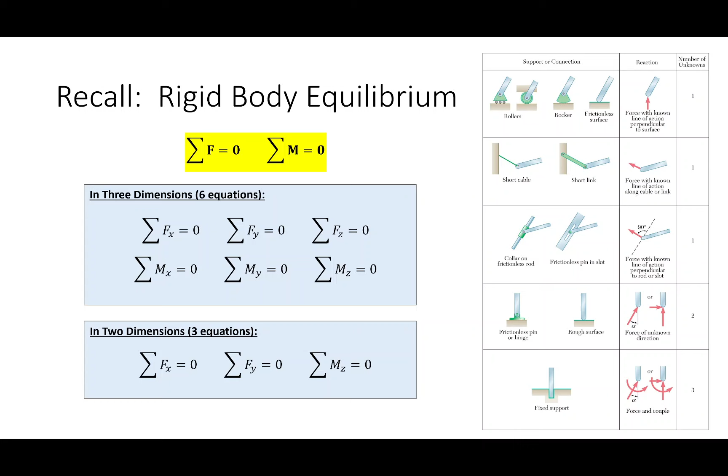Now, one thing that is worth discussing is that in 3 dimensions, we have different boundary conditions, right? We have different support conditions to consider, okay? And if you open up your textbook, there's going to be oodles of them.

And what I tend to think is that this doesn't really test your knowledge as an engineer more than it is just reading the diagrams in the book. So I tend to restrict most of my problems to one of three, I guess I would say. So I tend to use either this one, or a cable. So something like this. And don't worry, we're going to have examples on these over the next couple of days.

This ball and socket joint is sort of like a pin support in 3D. So it has unknown forces but no moments. Okay, so it freely allows rotation, but it prevents translation. So if you ever see a ball and socket joint, it's going to have an unknown reaction in the X direction, the Y direction, and the Z direction, right? A fixed support in 3D would just have reactions everywhere, right?

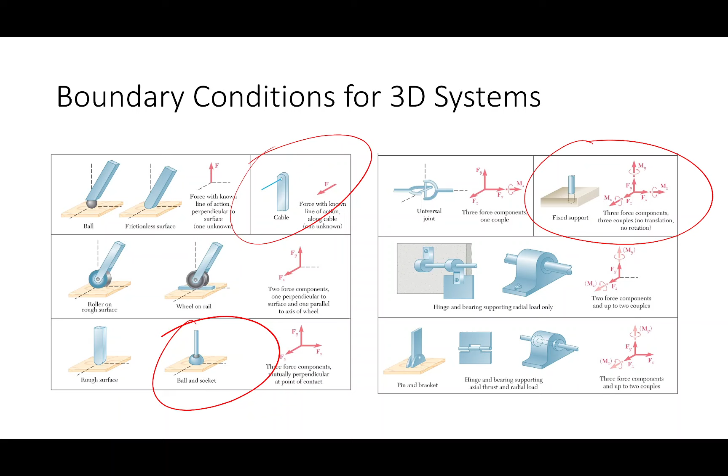And then a cable is only going to contain one unknown, and that's along the direction of the cable, right? You have a cable, you yank on it, what's the tension in the cable? We've already had problems like that before, so it should be pretty straightforward, okay? Does that make sense? Okay, if that makes sense, the best way of learning this stuff is to just dig in, okay? So let's digest our problem a little bit, and let's see what we got going on here.

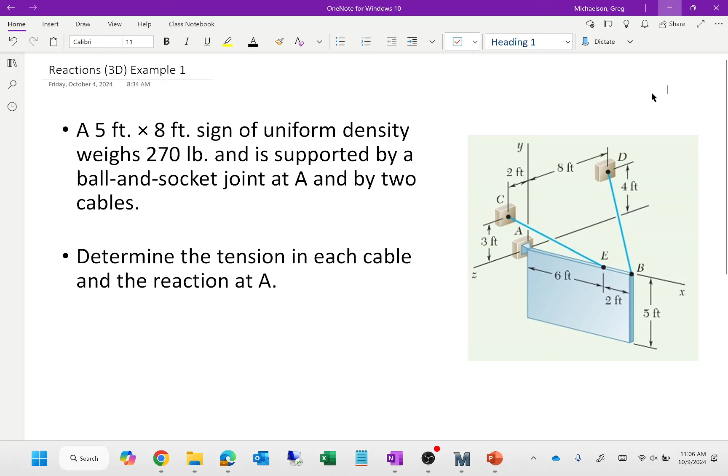Okay, so I have a 3D reaction problem. I have a sign, it's a 5 by 8 ft sign of uniform density, so I'm also trying to pepper in these ideas of a centroid and center of gravity and all that. But I got a 5 by 8 ft sign, it weighs about 270 pounds, and it's supported by a ball and socket joint and by two cables here and here, okay? What I want to do is determine the tension in each cable and the reaction at A.

Now I'm technically only specifying like 5 unknowns when really if it's a 3D equilibrium problem it should have 6. But the 6th unknown is sort of going to be analogous to this. Like here's this problem and yeah there's an unknown, but what is it? 0, right? So there is an additional unknown sort of along the z-axis this way, but because everything's sort of parallel, it'll be 0. Okay, so we're going to determine the tension in each cable and the reaction at A. Okay, everybody with me on that?

So here on the board I have some unknowns, and everything we have here on the board we're going to end up putting in the notebook, so it's not like you're going to miss anything if you're just watching the video. But we have here the unknowns, and then I'm going to list all the forces and all the moments. Okay, so let's talk about our unknowns. So we have the tension in each cable and the reaction at A. So I'm going to call my unknowns tension EC, tension BD, and my reaction at A, okay?

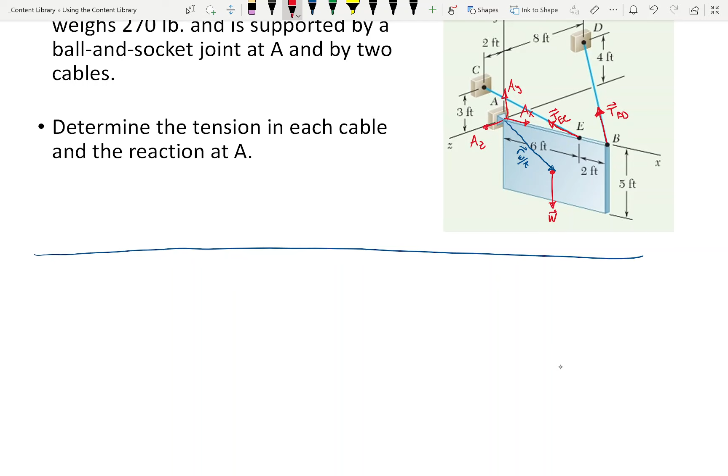Now the first thing I'm going to do is distance vectors. Why am I doing these distance vectors? Because what I'm trying to define are these. I already have this vector defined. I already have this vector defined. So if I do these, then I can define these. So we'll write a vector for EC and a vector for BD, turn them into lambdas and then turn them into force vectors. So give me a little bit of space.

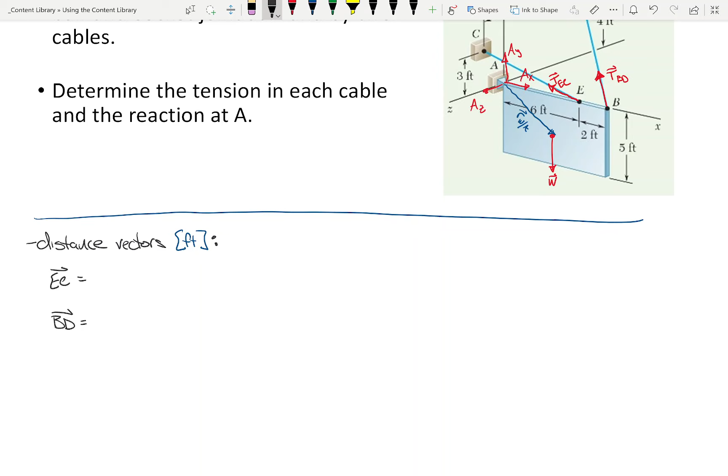So EC, if I'm going from E to C, along the x-axis I'm going -6. Along the y-axis, +3. Then along the z, +2. Does that make sense? So it would be -6i plus 3j plus 2k. Is that fair? And we'll say that's feet. I'm going to put the feet right here.

And for BD, from B to D, we're going -8 in the x, along the y going up 4 feet, along the z, -8. Is that fair? Did I do that too fast? Again, the x-axis is along the sign, the y-axis is up and down, and the z is sort of in the plane of the sign. So -6, +3, +2, and -8, +4, -8.

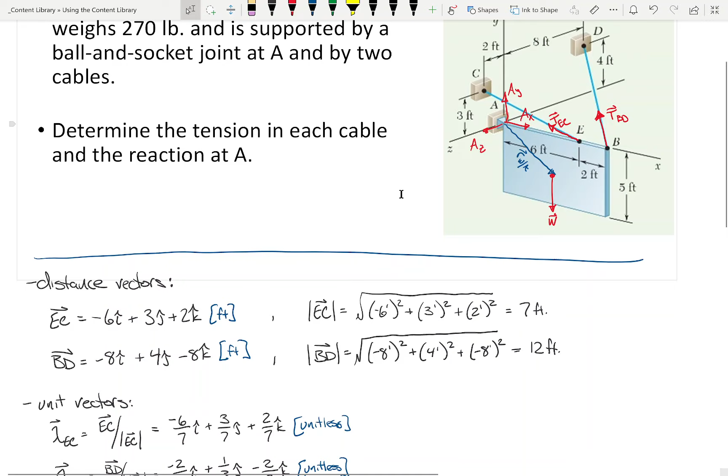So, would you agree that this is... Would you agree with that? Yes. Could you explain the weight one more time? So, okay. So along the X, from A to here, the whole sign is how wide? So we go halfway over, 4. Along the Y, it's 5 foot tall, so we go down 2.5. And then we don't go any this way. All right. Everybody okay with this?

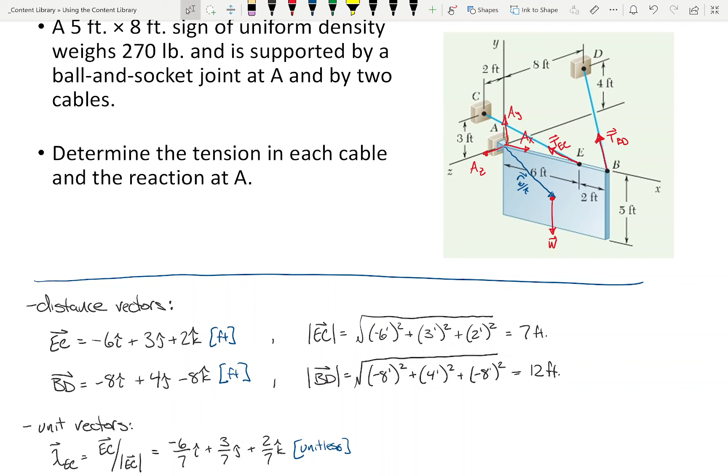So here's my point with this problem, okay? And I know there's a lot here on the screen right now, but really what I'm trying to do is just make sure that we're all in line with what we need to do, right? So let's take a step back. So our strategy, what we need to find is this, and that vector, right? We're going to hold off on doing this, so we're going to sum moments. Okay, so we've described everything. So what we now need to do are 3 cross products, right? We need to cross product this, this, and this, and we need to sum them.

Notice how there is no cross product related to A. Why? Like we have a cross product for this force, for this force, for this force, but not for A. Why? Because we're summing moments at A. So if we wanted, we could say that MA is 0 because it's force times 0, right? Does that make sense? So if you need a term there to make your notes pretty, that would be it. Okay? All right, so let's do some cross products. Let's do them one at a time. Okay, does everybody have all this? Okay. So

The nice thing about this problem is that there's lots of zeros, and zeros are very nice to multiply with because zeros make zeros. Okay, so let's do M BD. So that's going to be r BA crossed with T BD. Now the way I'm going to do this is this. T BD is going to be the magnitude times the lambda. So I'm just going to stick the lambda in the cross product and stick the magnitude on the outside. So what that's going to be is I, J, K. R is 8, 0, 0.

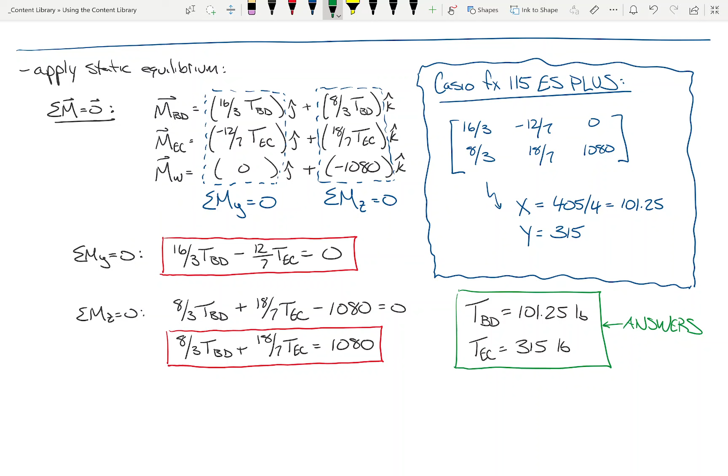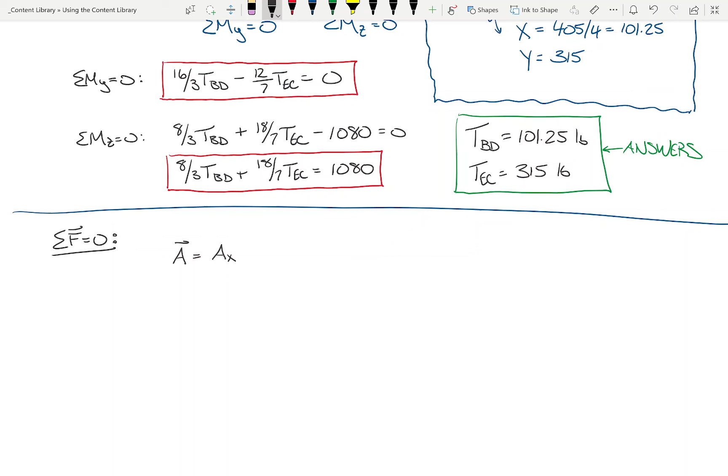What equations of equilibrium do we have left? Sum of forces, right? So what we'll do is we'll now sum forces in the x direction, or sorry, sum forces in every direction. We're going to have the A vector, we're going to have the W vector, and then we're going to have this. Now, how am I going to get these vectors?

Remember that this is the magnitude times the lambda, right? Don't we have the lambdas? Don't we now have the magnitudes? So if I were to tell you that this is negative 67.5 I plus 33.75 J minus 67.5 K, would that really be that crazy? So we took the answers in the green box times the lambdas, right? Yep. And this one is minus 270 I plus 135 J plus 90 K, right?

So think about it like this. Now, if I sum the columns, these are going to be pretty easy, right? I mean, take a look at the x column. AX minus 67.5 minus 270 equals 0. It's pretty easy, right? So therefore, AX is what? 337.5?

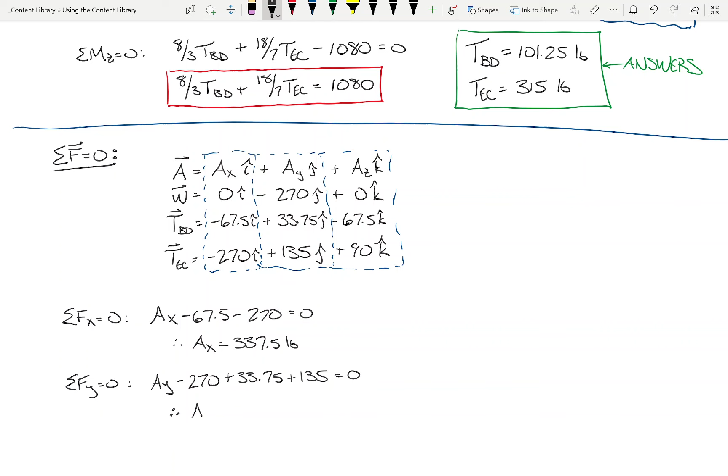If I sum forces in the y direction, I get AY minus 270 plus 33.75 plus 135 equals 0. So therefore, AY is 101.25. And then if I sum forces in the z, that is negative 22.5. So A is 337.5 I plus 101.25 J minus 22.5 K.

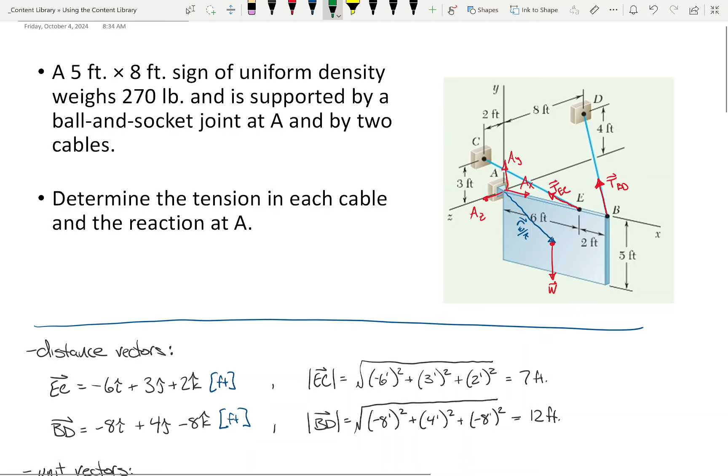In 3D, how would you show what your positive direction is for like K? That's a good question. So for K, positive K would be along the positive z axis. So if it's negative, it's just going the other way. Okay. So if you want to get technical, let me scroll up real quick. When I drew these arrows here, I was drawing AZ along the positive K. I was wrong. It's actually going that way. When I wrote that this was positive, I was assuming that it was going along the positive z-axis, and that assumption was wrong. That's what that means.

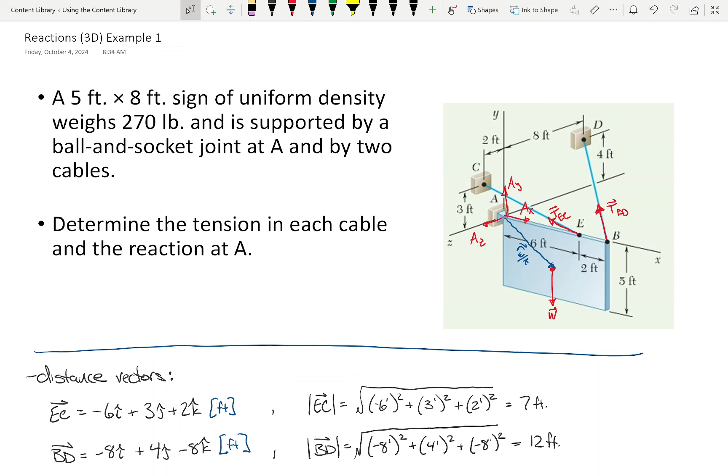But in an answer, you wouldn't expect... No, for 3D, I just want the vector. Okay. Yeah, for 3D, if you get that, we're good. Now, here's the other thing I'll say, and then I'll let you go. This was a lot, wasn't it? This is a lot to process, so much so that when you come back from break, we're just going to do another one, just to get comfortable with it, because, whew, these are a lot.